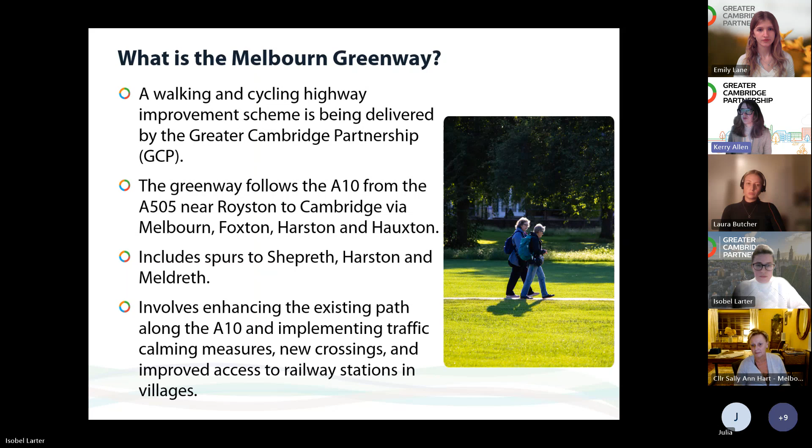In essence, the Melbourn Greenway follows the A10. It starts at Trumpington Meadows, continues down, and has some little spurs that you can see where it pops into Harston, Shepreth, and makes that connecting loop into Meldreth. But for the most part, it does follow the A10 until it goes through Melbourn Village and then reconnects south of Melbourn Village back onto the A10, where it then connects to a route that will hopefully end with a bridge into Royston.

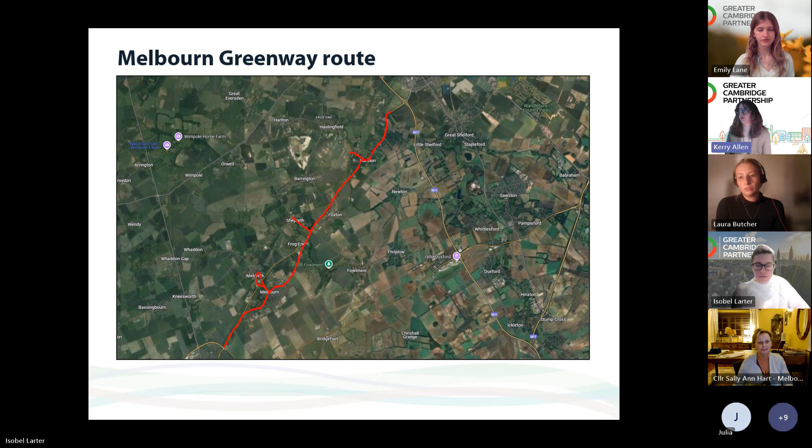So in terms of the route itself, it's providing a good end-to-end route. Next slide, please, Izzy. In terms of the route itself, it's making use of the existing highway, but it's providing those enhancements. It's widening footpaths out so we can create shared use paths connecting into existing infrastructure as well. So again, the key objective is providing that safe end-to-end route.

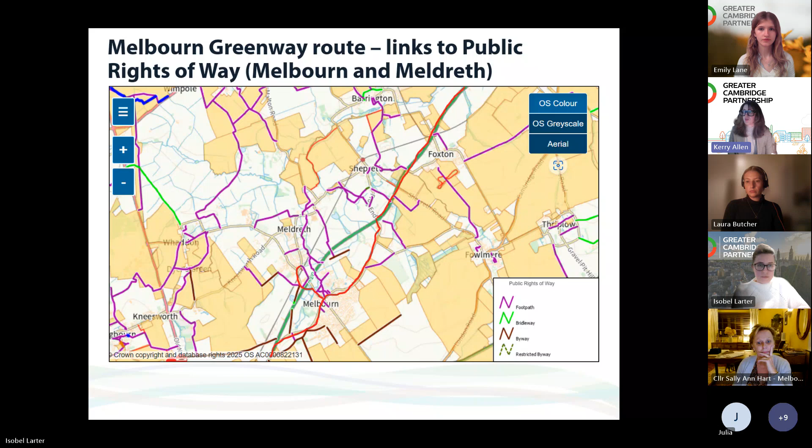And it's trying to connect with other existing routes for walking and cycling. As you can see here, connecting in with the public rights of way that are available. I've had to superimpose for Melbourn and Meldreth, but certainly we see these greenways as providing a point at the moment to connect in with the existing infrastructure, but also a purpose to build upon. So if there are future schemes that come forward, they will also obviously link into that. Next slide, please, Izzy.

It's important just to revisit this point as well. There has been quite a lot of engagement work that's taken place with members of the public on the greenways, in particular the routes and what they look like. Certainly there has been three key consultation events that have taken place with members of the public and stakeholders, and that's been really effective in helping us to shape the proposals that we have today.

And certainly we're continuing to respond to changes and things that happen along the way, such as new development cropping up, so we have to bear that in mind. And indeed there has to be a cut-off point - we can't keep making changes forever. But it's quite pertinent to just act as a reminder that there has been that engagement with members of the public.

In particular looking at autumn 2022, there's been quite a lot of feedback that we've picked up, in particular in terms of the arrangements through Melbourn itself. At the time, what we were proposing was a 20-mile-per-hour zone, which Melbourn now has. With Meldreth, that's something that's coming, and we'll talk about that a little bit more in detail in a moment. But it's just really key to point out that people did have their opinions on the 20-mile-per-hour zone, and some people felt that the 20-mile-per-hour zone on its own didn't go far enough and actually needed some physical measures put in place to ensure that people maintain that speed throughout the village.

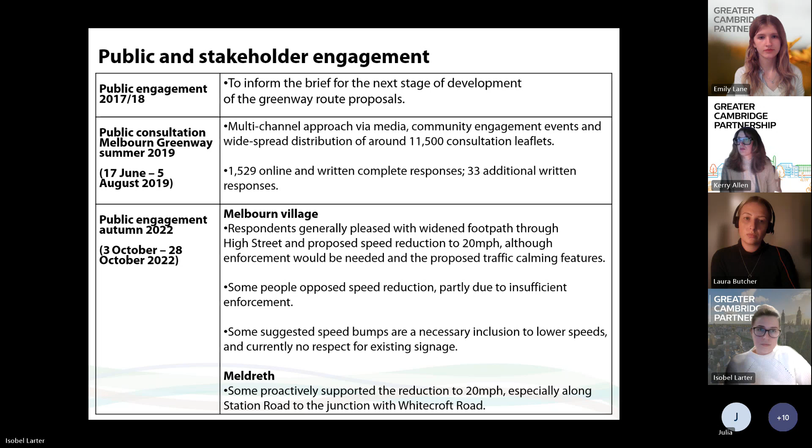Okay, thanks. So if you can bear with me here, because what I want to do is describe to you what the current or the previous design through Melbourn itself was going to do, and what the new design will do. This is a little bit fiddly because we'll be talking about Melbourn and Meldreth in terms of the previous designs - we will take a look at those and then talk about the changes.

I think ultimately what I want to get across this evening is that the focus is really on what we're proposing to do for traffic calming. The rest of the proposals, such as widening of footways and crossing points, will remain the same. So the focus really for this meeting, and indeed for the traffic regulation order, which is the form of consultation that we will use to allow you to have your say, really focuses on those traffic calming measures.

But in terms of what was previously proposed, it was a series of enhancements to the existing footways into the village itself. For example, north of Melbourn village, we were wanting to extend that shared use path into the village. We became very much aware very quickly that we didn't have the space to continue that segregated pathway, so we had to move to something where we were putting people on the carriageway, that mixed use arrangement. Again, we had to think about what we did there to ensure that the speeds of vehicles remained low, and that people who were cycling felt safe to be on the carriageway.

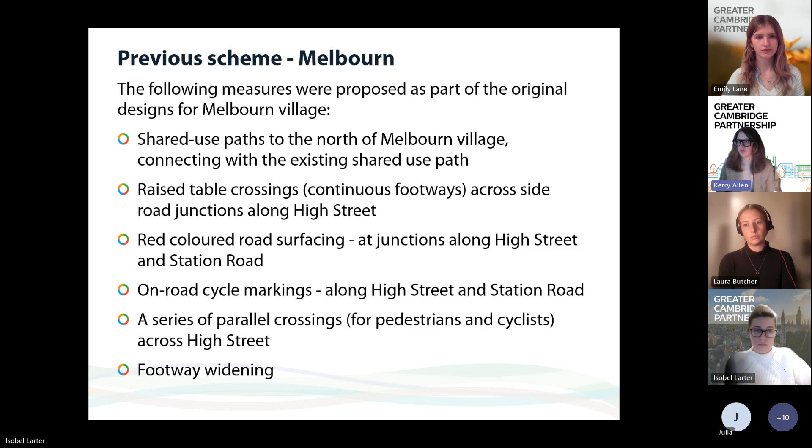For Meldreth, it's very much the same in the sense that we were looking to use red coloured road surfacing to curb vehicle speeds. The same traffic calming approach applies in both villages. For the most part, the rest of the scheme stays the same, where we're looking to widen footways where we can, but mixed use for cyclists on the carriageway will remain.

And how that translates a bit more in terms of plans. If you bear with me, I'll ask Izzy to stop sharing and I'll share my screen.

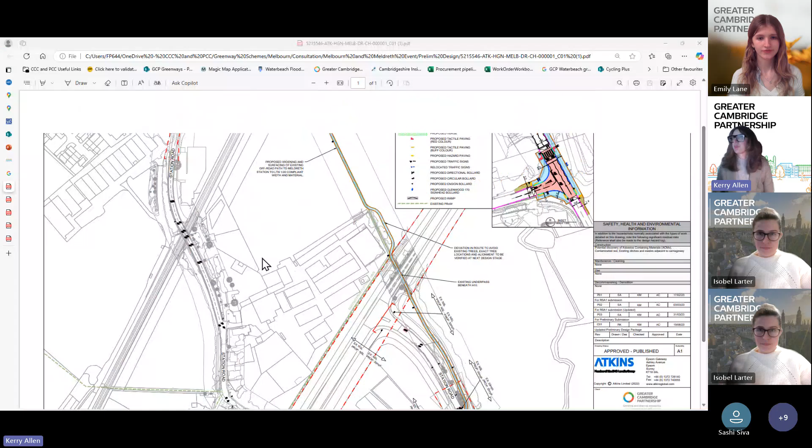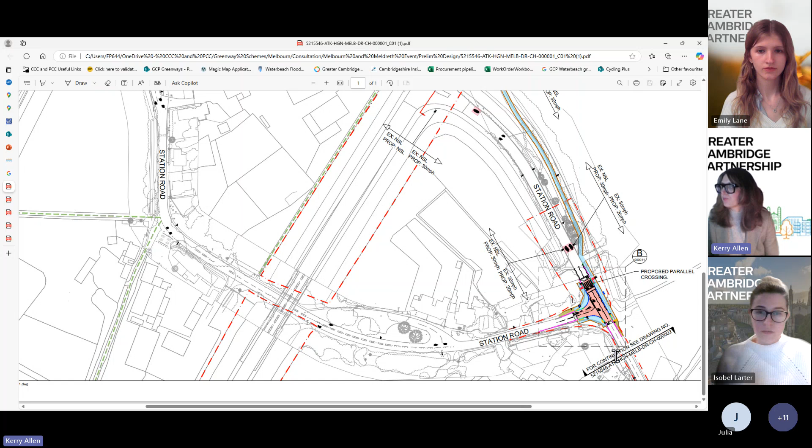Okay, I think this is the one. So if we start with Meldreth first, just to give an example - the resolution is always tricky to get right for everybody to see. But you'll see this red surfacing, so there are no physical traffic calming measures in place; these are known as psychological. It makes use of the red surfacing, and then road markings all the way through Station Road, which takes us to the point where it meets another part of Station Road, linking off to the A10 and up to Melbourn Village itself.

Hopefully this will change - hopefully you can see a different screen. Yes, team's nodding their head. So this brings us into Melbourn, into the High Street itself, from this point here. Again you can see the use of the red surfacing.

There are certain points where we've widened out the footpaths, but again we're making use of that red surfacing. Coming from the northern section of Melbourn, it's pretty self-explanatory that there's the red surfacing used. In actual fact, it was applied all the way through on the southern section as well, all the way through Melbourn itself.

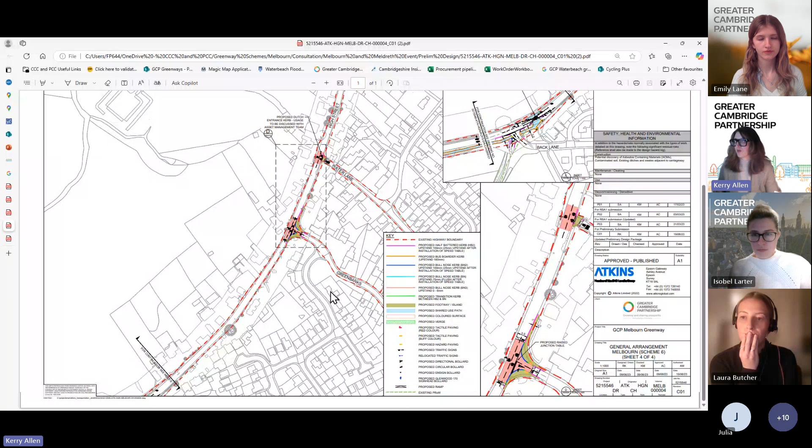Izzy, do you want to share your screen again? We can come back to these plans - I'm quite happy to when we come to the questions. Okay, hopefully we're back on the slides now. If you can just go to the next slide.

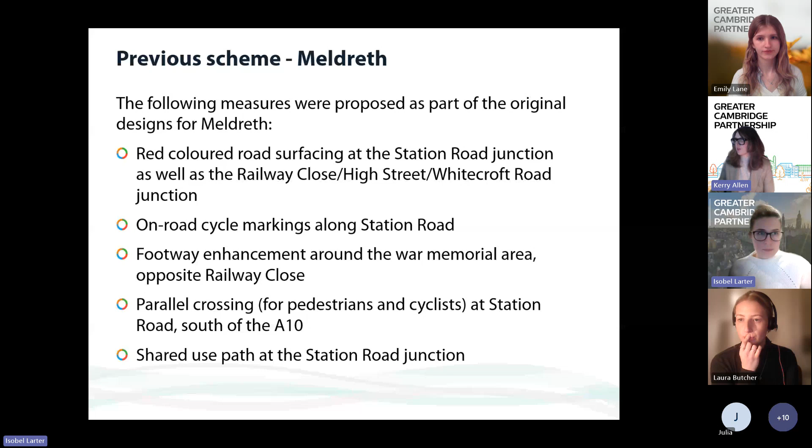So in terms of the new proposals, ultimately what we want to do is move away from the red surfacing, and we're looking to put physical measures in place - I'll make sure you have sight of that. What we want to do is put those physical measures in place to complement the 20-mile-per-hour zone that currently exists within Melbourn Village, but also the 20-mile-per-hour limit that will exist within Meldreth. The rest of the proposals we're looking to put in place will stay.

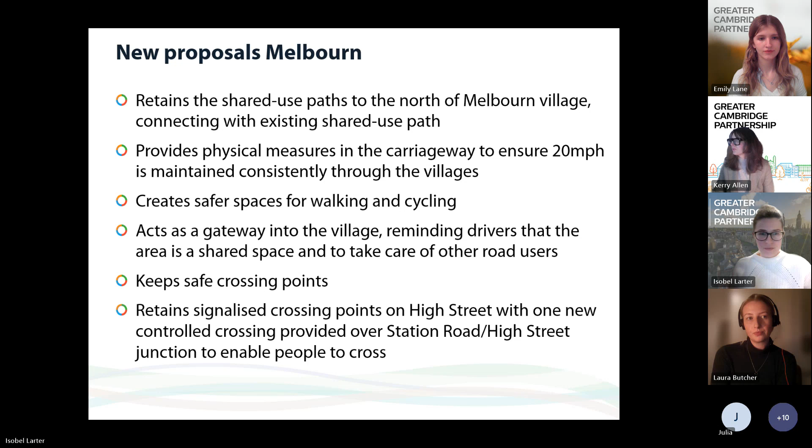So that will mean the widened surfacing and the crossings will stay. It will purely be the movement from the red surfacing to actual physical speed humps that we're looking to put in place. So what that actually looks like - if you can bear with me, hopefully this will by magic change and we will hopefully see a plan. So again, if I take you back up to Meldreth itself.

Let me just improve the resolution here. So what we're looking at is actual physical measures, in the form of raised tables and speed humps. You'll see that previously in the original plan we had this red surfacing. What we want to do is replace that with a raised table, which provides that physical measure to reduce the speed of vehicles. Coincidentally, it also ties in with the rest of the proposals for Station Road that goes all the way up to the primary school, where there are existing road humps - providing a consistent message to keep speeds low, that there are other road users on the carriageway.

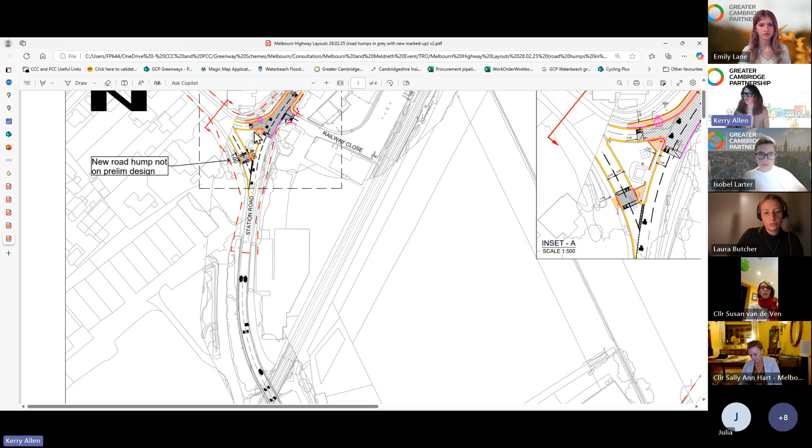What we've also wanted to do is put in a raised hump from Station Road to Whitecroft Road. We know there are issues with speeding along the bridge itself, so to complement that 20-mile-per-hour limit, we're looking to put in a speed hump there so it curbs speeds - people can't just pick up speed and swing in here where you have pedestrians and people crossing to get from the village to the railway station or indeed to the school.

Moving on, we're looking to replace elements of the red surfacing with speed humps, and that continues all the way along until we get to Station Road, which links up to the A10 this way, and then up to Melbourn Village in the opposite direction.

We want to retain and improve the footways, certainly improving the area around the memorial, providing wider footpaths where they didn't exist. The crossing points will remain the same as originally proposed. We want to provide a new crossing point here, which was originally proposed as part of the preliminary design and what we would have consulted on.

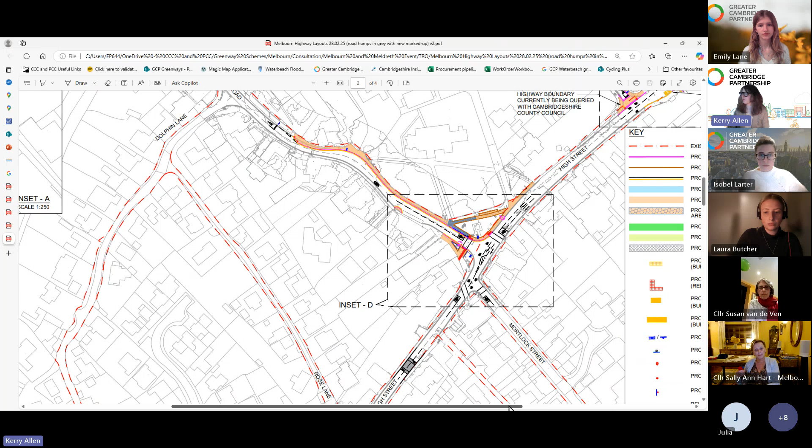Moving up through Melbourn Village itself, let me just double check that's going to give us what we need. Again, the red surfacing is going to be replaced by speed humps.

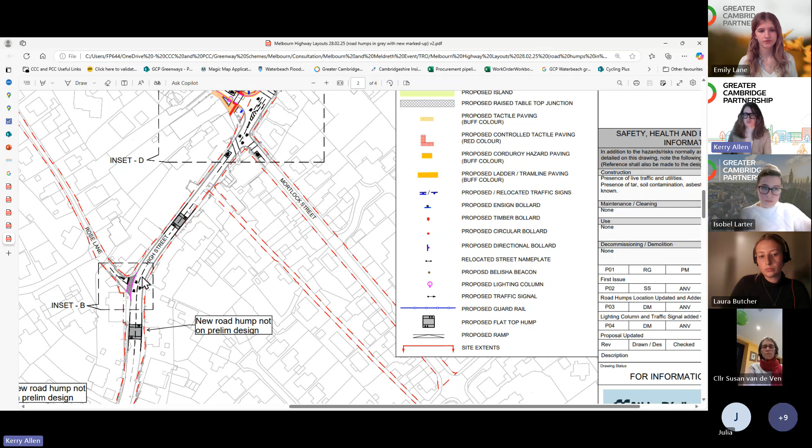The same goes to the south. There are side roads where we're looking to apply raised crossings as well, referred to as Copenhagen-style crossings. What that does is reduce the speed of vehicles coming in, giving pedestrians priority, which is set out in the highway code.

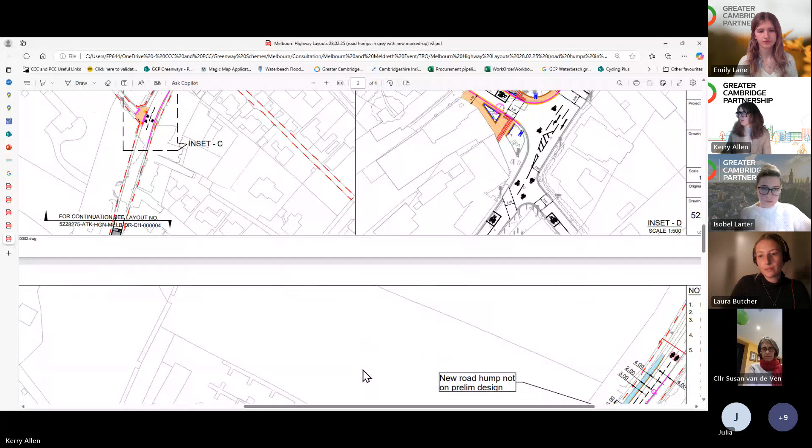Coming down through the village, it's more of the same with speed humps. Then, apologies, it takes us back up to the north of Melbourn, where we have the shared use path that comes in with the speed hump to the north. Again, footway improvements that we're looking to do.

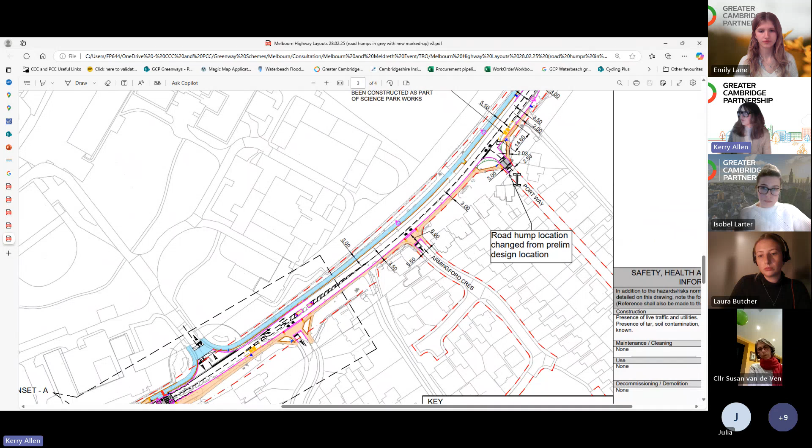Continuing down and linking in with the access point for the science park, providing a safe crossing point as well, so that people can get across to the science park itself.

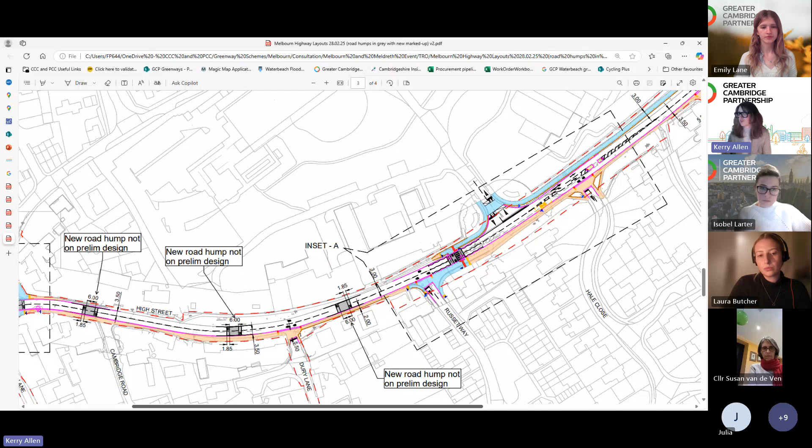Continuing down, you can see again that repetition of the speed humps. We're trying to keep these about 100 meters apart so it provides consistency, and again it reminds all road users to keep speeds low.

In this area, which links up to the college and also other key facilities, we've looked to provide a raised table.

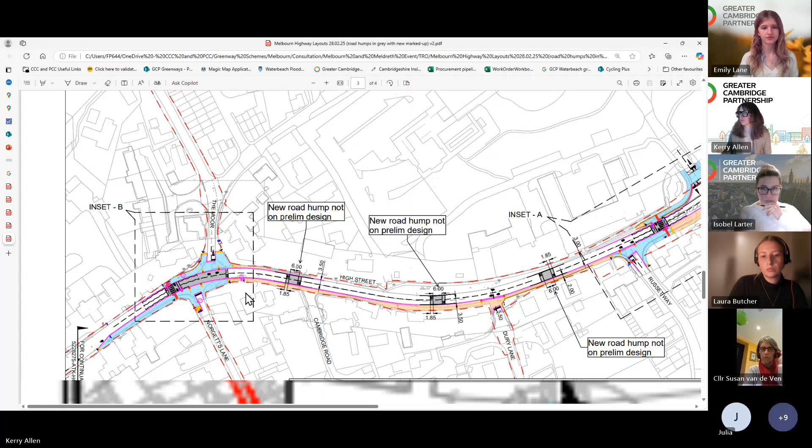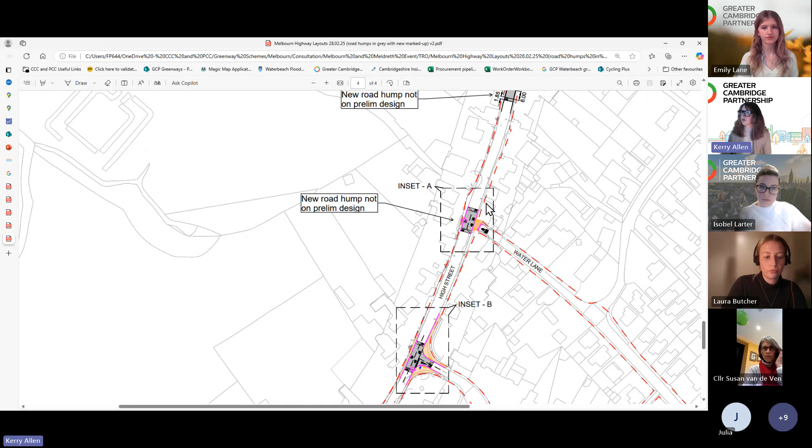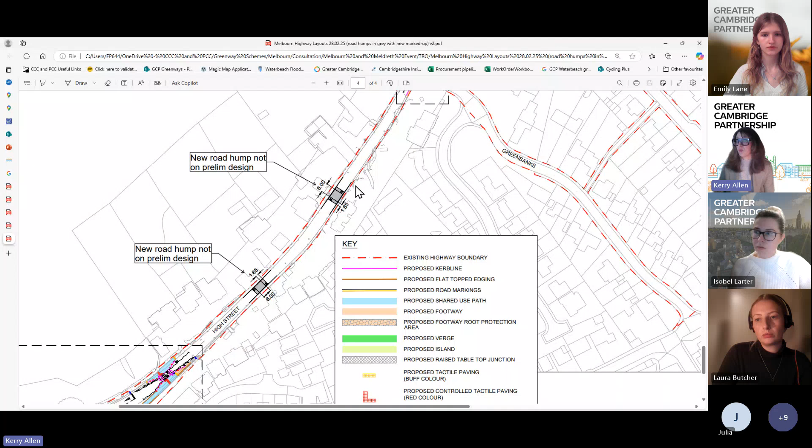Going to the south of the village, again it's more of the same with the raised speed humps. It's providing a reminder that speeds are to be curbed, and it's giving more safety to people who are cycling and walking who want to cross, and we've put in new opportunities for people to do that.

And then it links into a shared use path, which will continue along the A10 until we get to Royston.

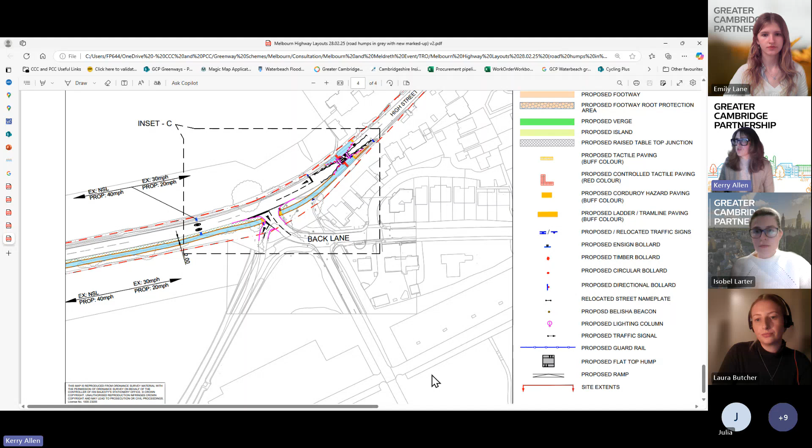I'm conscious that's quite a quick whiz through the designs themselves, and I'm more than happy to come back and go through those a little more slowly with people when we get to the questions. But let's get through the rest of the presentation first. Izzy, if you can reshare your screen for me.

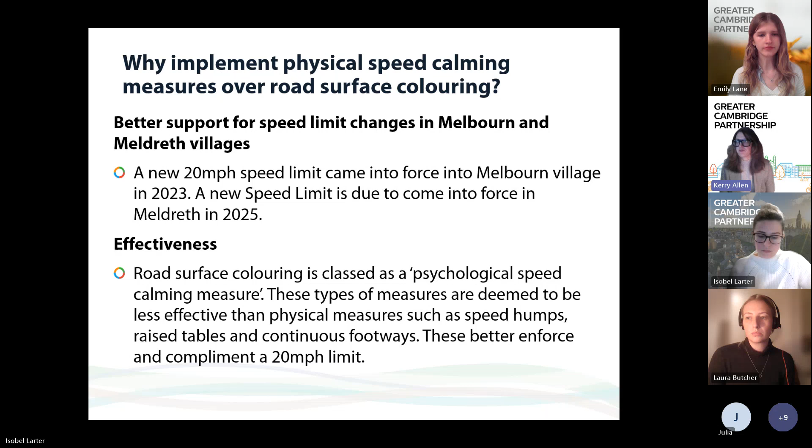In terms of effectiveness, the red surfacing is not deemed to be an effective way of keeping speeds low. So we've had to relook at this and consider what we need to do to ensure speeds remain low. There have been many studies looking at 20 mph zones and their efficacy, and it comes as no surprise that without physical measures in place, they're not very effective. Izzy, if you can just go to the next slide.

As I say, there have been quite a few studies done on that, and it's proved that. We're very much aware that the police themselves are also not a fan of 20 mph zones without the physical measures in place.

I think there's another thing to consider here, which also affects place shaping for Melbourn and Meldreth. We're very much aware there are conservation areas around, in particular Melbourn Village, and we want to make sure they remain aesthetically pleasing and pretty, because what we're trying to create here is also places that people want to come and visit.

So actually the change in the red surfacing will help improve the look of the village itself, rather than having red surfacing everywhere.

That is really important, because when it comes to the maintenance of that red surfacing, it becomes very costly and expensive for the county council. So what happens is they remove the red surfacing and replace it with black tarmac, and that's not something we want. The greenways we want to last as long as possible, and we want them to look good for as long as possible. So again, this is another consideration.

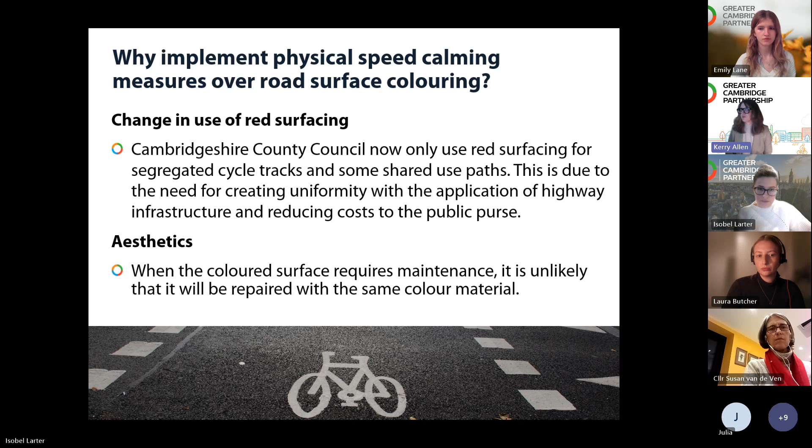Next slide please, Izzy. And I did mention this earlier about the need for physical speed reduction measures. As I say, there have been many studies done on it, and the conclusion is it's not self-enforcing without physical speed measures.

It's not deemed effective by the police. Actually what they tell us is if you are putting in a 20-mile-per-hour zone, you really do need to be thinking about physical measures, because the police do not have the resource nor the time to sit in one location checking that everybody is doing that speed.

We also need to remember this is a walking and cycling scheme, so there are guidelines and rules we need to abide by when designing walking and cycling schemes. Local Transport Note 1/20 tells us that where we are looking to put in a 20-mile-per-hour zone, we should be putting in those physical measures.

Psychologically, for people who cycle, that also gives them confidence, because they know they're not there on their own. They have something physical which is curbing the speeds of the vehicles going past them.

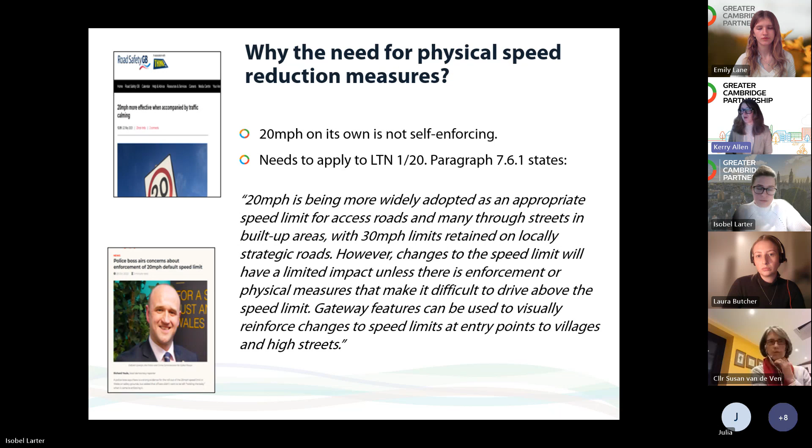Next slide please, Izzy. At this point, I'm going to give my voice a rest and let Laura explain to you about the traffic regulation order. This will be the process that we will use.

What we've done is put out the plans showing the speed humps, and that is really your opportunity to comment on those. It has gone live as of today, but rather than stealing Laura's thunder, I'll let Laura talk through the traffic regulation order and what that is.

Thanks, Kerry. So yes, the traffic regulation order is a legal document that will be used to implement the traffic calming measures Kerry has just discussed. As Kerry said, it acts as our consultation period. It's 3 weeks long, it opened today, and any responses or comments should be submitted by midnight on the 23rd of March. We've also set up inspection points at the Melbourn and Meldreth Parish Council offices.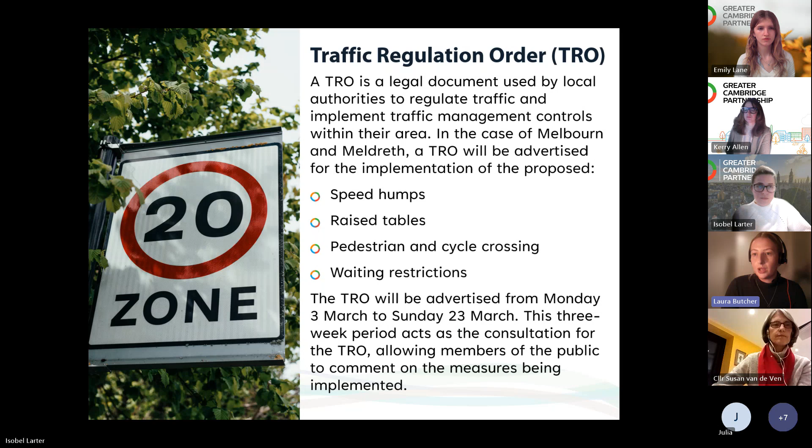So if you'd like to see a hard copy of the plans or of this PowerPoint, that's where you'll be able to view them. If you would like to comment on the TRO, you can visit the Melbourn Greenway website page on the GCP website, where the information is available. If you go to the next slide please, Isobel.

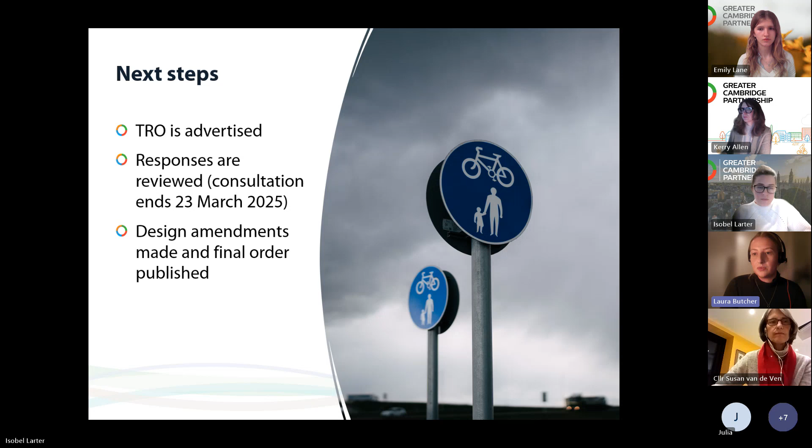Thank you. In terms of next steps, the TRO is advertised, as I say, at the moment, and it will be open for 3 weeks. The responses will be reviewed, and then eventually design amendments will be made and the final order published for the TRO. So yeah, back over to you, Kerry.

Thank you, Laura. I think now is a good time to open the floor for any questions. I can see there's already a hand up from Councillor Hart. Please let us know if you have a question, and if there have been any questions in the chat as I've been going through the presentation, I think Izzy and Emily will let me know. But Councillor Hart, do you want to start? You're on mute, Councillor Hart.

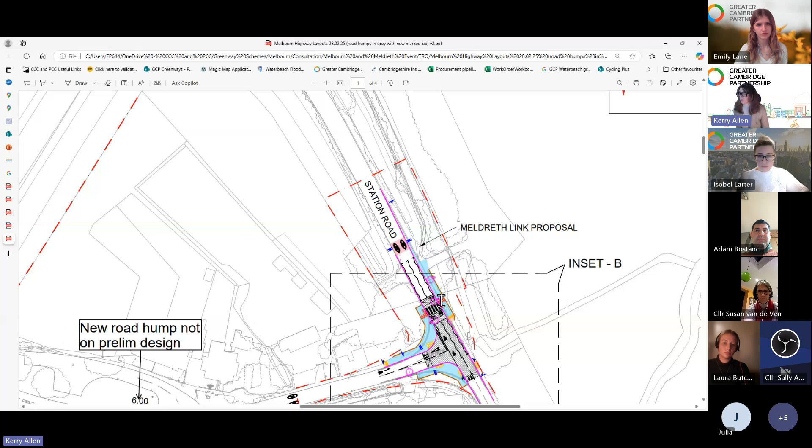We refer to them as a parallel crossing, or they're known as a tiger crossing. What it does is segregate pedestrians and cyclists - cyclists here and pedestrians here. As a cyclist, if you're using it, this is the shared use path, wide enough for pedestrians and cyclists. They'll slip on here - cyclists will use this point, pedestrians will use this point. That's the arrangement that will then connect in with the Meldreth link.

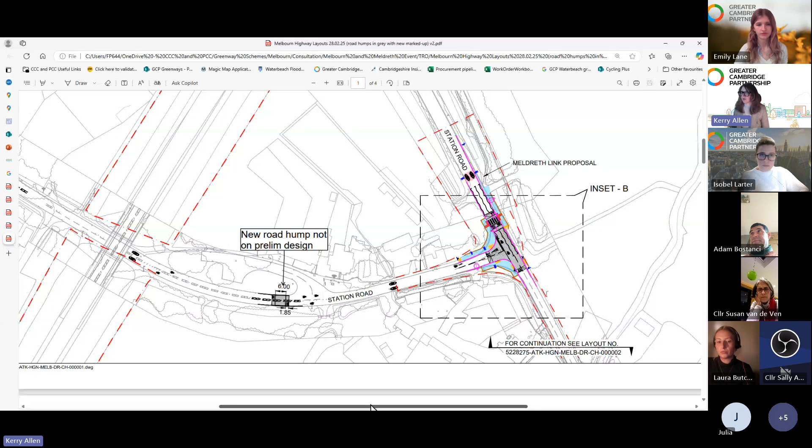In terms of how that looks going up to the bridge and around to the front of the station, we'll have a speed hump here, continuing all the way along Station Road. It's reducing speed up towards the bridge, and over the bridge again at this point, because we're aware this is an area where people are crossing. The provision here isn't great at the moment, so there'll be a raised speed hump here, and a raised table at this point, just to improve the crossing points of getting people across the road.

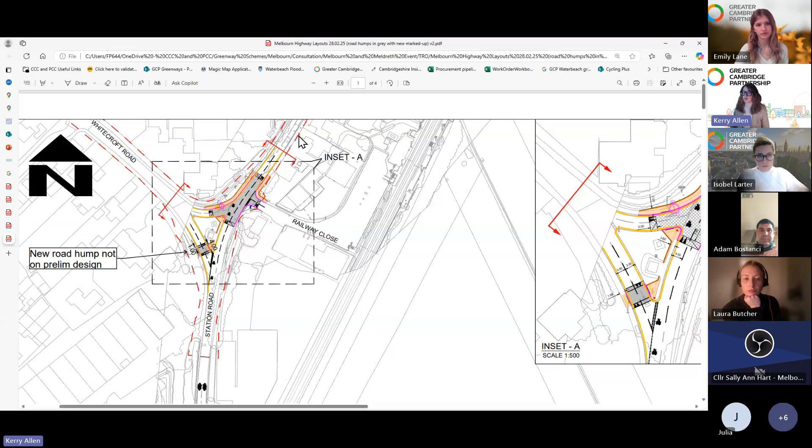It's important to point out that there currently are double yellow lines along some of this section, but we're looking to infill that with double yellow lines as well, so we can keep visibility on this section, so people can see where to cross, and motorised vehicles can fully see where there are people milling around or crossing in this area.

Does that answer the question, Adam? Yes. Can I ask a very quick follow-up?

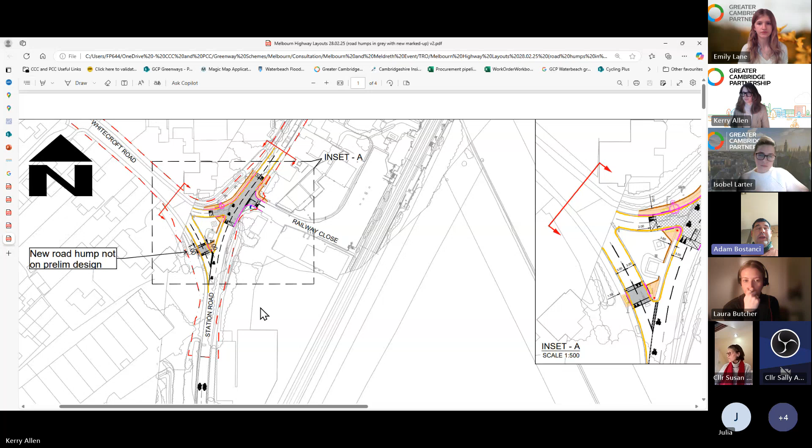You've mentioned the speed humps - could you describe them in a bit more detail? I think the standards have changed. For example, at the Tesco car park in Royston, I believe they've recently changed the speed hump, and it's become much less aggressive from a driver's point of view.

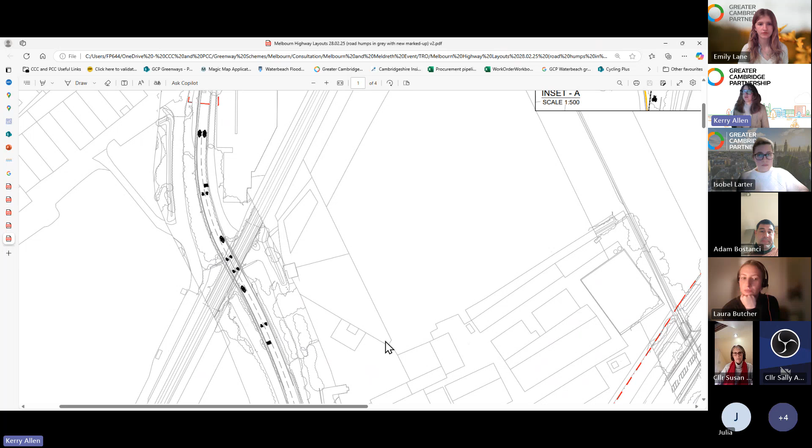What we're looking at providing is speed humps 75 millimeters high, covering the full width of the carriageway. We've moved away from previous schemes with speed cushions that had space either side - that just means motorists position themselves either side of the gaps, and it has no effect at all. So we're looking for the complete width of the carriageway, flat topped but sinusoidal ramped, which is really important because it gives a smoother transition up and over the speed humps.

They're aggressive enough to reduce the speed of the vehicle, but not to the point where you're going to lose the front of your car. It acts as a constant reminder and physical barrier to say you need to slow down. With that 100-meter spacing we're looking to achieve, it's a consistent thing rather than vehicles getting over the speed hump and then just getting up speed. It's trying to make sure they're maintaining that 20 mile per hour speed.

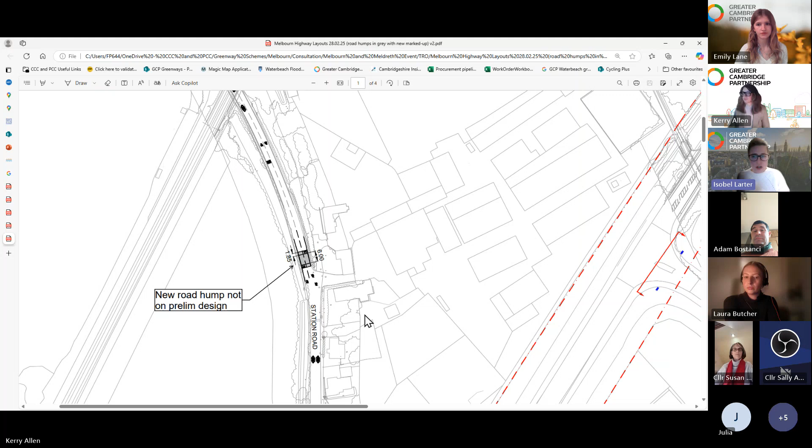No, I'm still not hearing anything. Kerry, Councillor Hart has put something in the chat, so I'll just read that out: please can you confirm speed reduction arrangements at this junction? She'd like to declare an interest, as she does live on the corner, but is very happy for speeds to be reduced, as they may stop further accidents when vehicles crash into the corner of their house. It also seems perfectly reasonable to enforce a 20-mile-an-hour speed limit through villages using physical methods, in her opinion. Thank you, Councillor Hart.

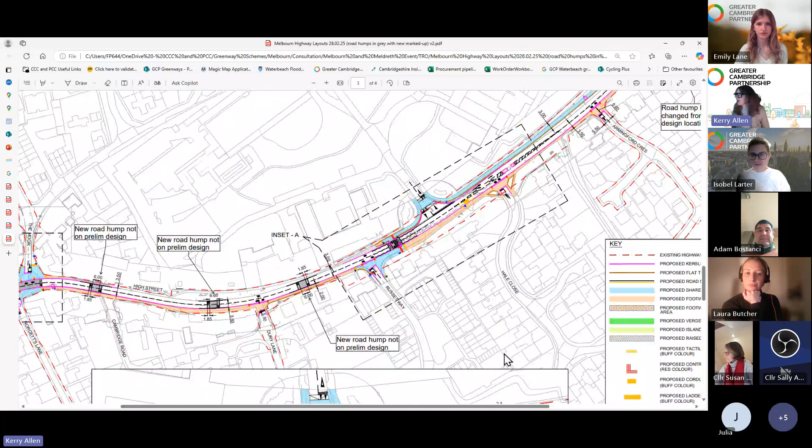Right, now I'm in the... sorry, my apologies. It's very difficult to try to get this into a way that makes sense. But Rose, I thought it was down here. I think you have it, Kerry. Do I? Okay, thank you. Oh yep, Rose Lane, right there.

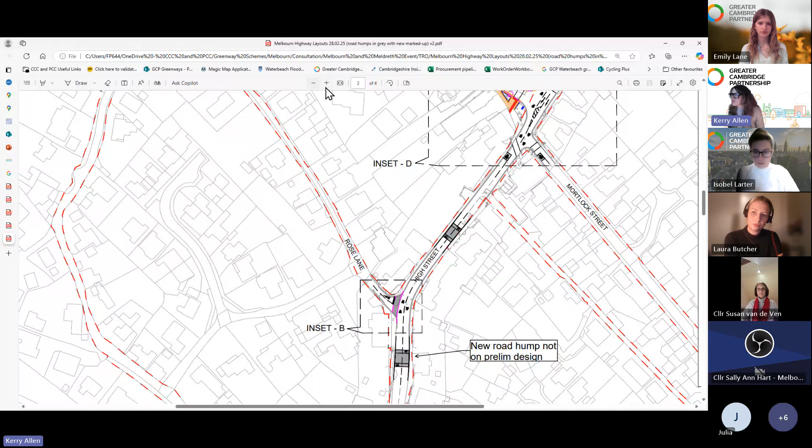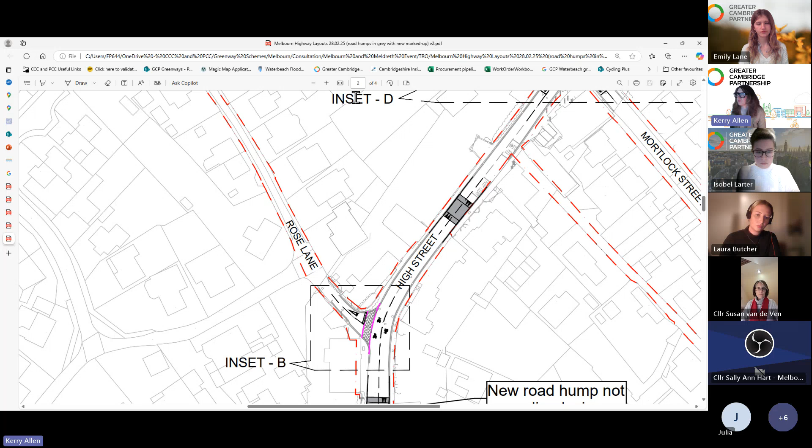So in terms of Rose Lane, Councillor Hart, there will be a raised speed hump to the north of Rose Lane, and then also one to the south. Also, if I can zoom in a bit more, in terms of the approach to Rose Lane, what we're wanting to do there is a physical measure — more a different use of surfacing to slow vehicles down coming through. That different use of surfacing acts as a reminder to them that this is a continuation of the footway, and to take care.

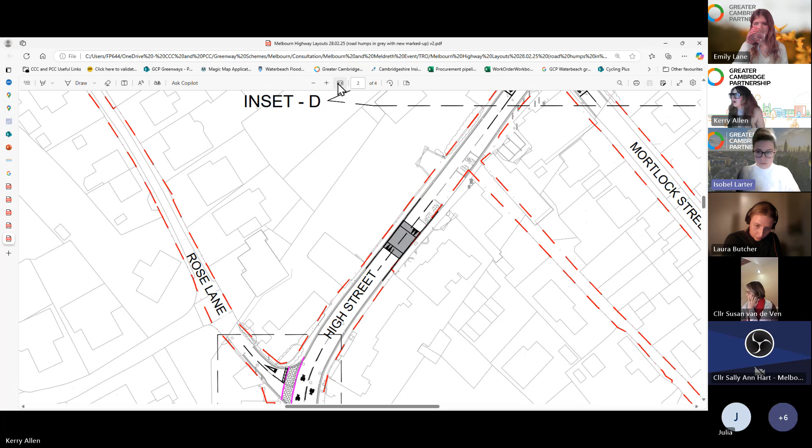I believe — just bear with me. Yeah, it looks like we're going to pull out the footway there just ever so slightly, and what that does is tighten the junction as well, so it prevents vehicles from being able to kind of swing in. So again, it's just providing that extra protective measure for people who are walking.

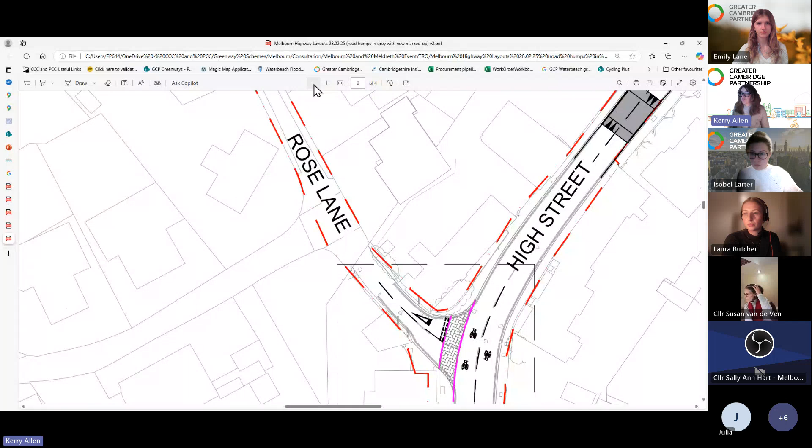Does that answer the question, Councillor Hart? If there's anything further, please do let me know. Thank you, Kerry.

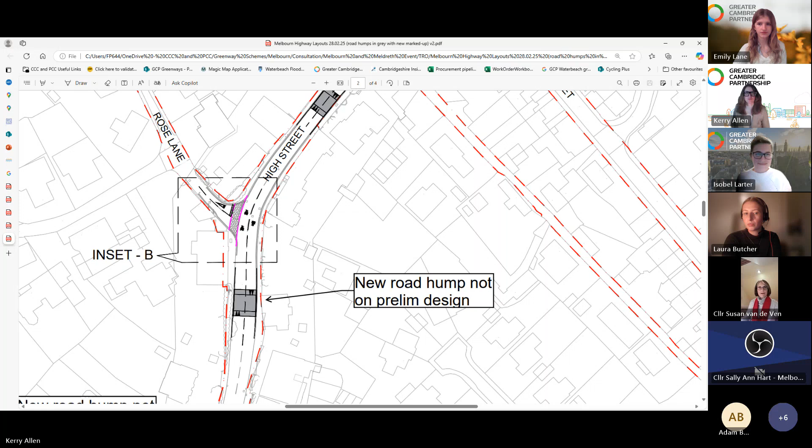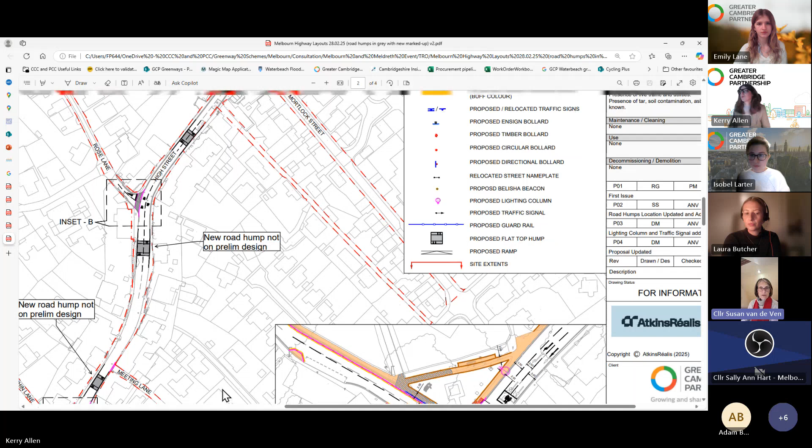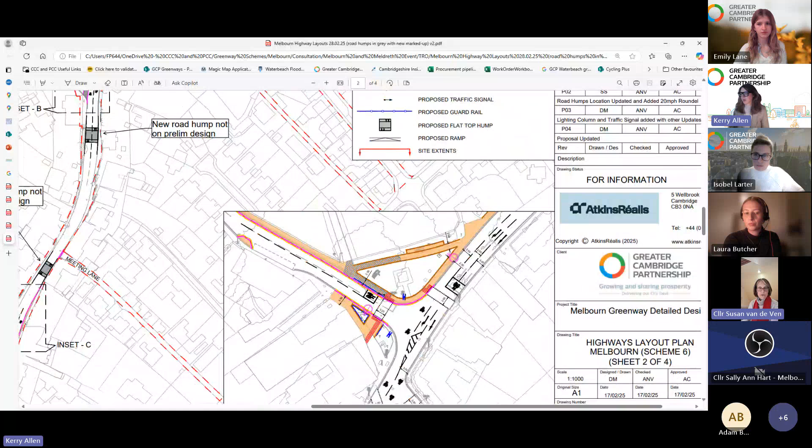The first one is, I wondered if we could focus again on High Street, Melbourn, from the traffic lights toward Back Lane — I guess that's the southern section. My question there is around the positioning of the speed humps, and where a speed hump is placed, I presume there would be a restriction on on-street parking in the vicinity. That's just a question about the reminder of the positioning. It's a very narrow stretch of the high street, and there is quite a bit of on-street parking, so I just wondered about any restrictions there, and how far the restrictions go — just to get a sense of that.

Do you want me to ask my other two questions first, or wait? So I'll deal with this one, and then we'll — just in case there's a follow-up on what I say. But okay, yeah, it's a good question.

Thank you. So I think certainly where the speed humps are being placed, we're trying to make sure that they are away from old buildings, and we're very much aware that on the southern section, on-street parking is a must, because there aren't any alternatives. In terms of the raised speed humps themselves, vehicles are permitted to park on them. We certainly do not have plans to put any double yellow lines or restrict any parking on those — they can continue to park on those as they currently do on the highway. So that shouldn't cause any sort of displacement of vehicles; they should still be able to do that as they normally do.

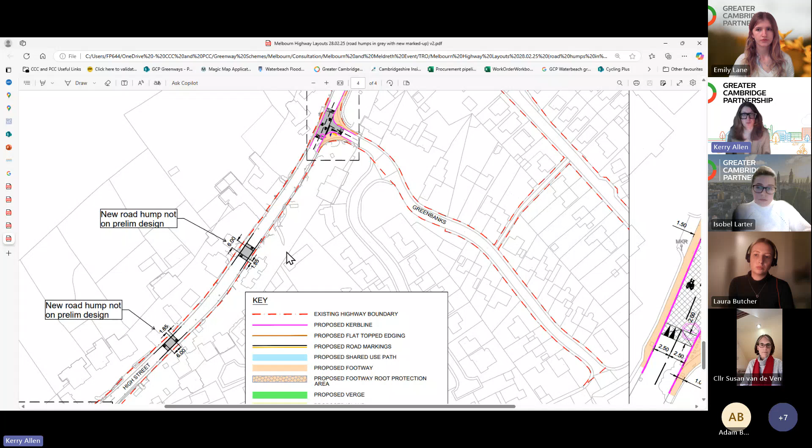Whereas with physical measures, you are forced to stick to the speed limit, because the physical measure is there. Unless somebody really wants to take their car over it at 30 or 40 miles per hour, which means they really aren't caring about their vehicle, let alone anybody else. We found you were getting over 90% compliance with the speed limit. The 20 mile per hour zone in Melbourn has had some effect, but looking at results sent over from previous traffic speed captures, there's still quite a big percentage of non-compliance. So with speed humps, you are forcing people into compliance, because unless you want to do real damage to your suspension through consistent high speed over speed hump after speed hump, it's a better option. It will ensure that 20 mile per hour compliance is fulfilled, which is what we want.

Does that answer the question, Susan? Yeah, no, that's great. If you can post that information on the website.

Thank you. The final question is about publicity of the traffic regulation order consultation. I know the parish councils are set up to reinforce the consultation, but will the GCP website have a link there that we can link to, so all the information is in one place? Yes, we will ensure the link to the traffic regulation orders and how to respond is all available from the GCP website. It's important to note people can respond via email or in writing. If people need assistance understanding the plans, there's a telephone number where somebody can walk them through the plans.

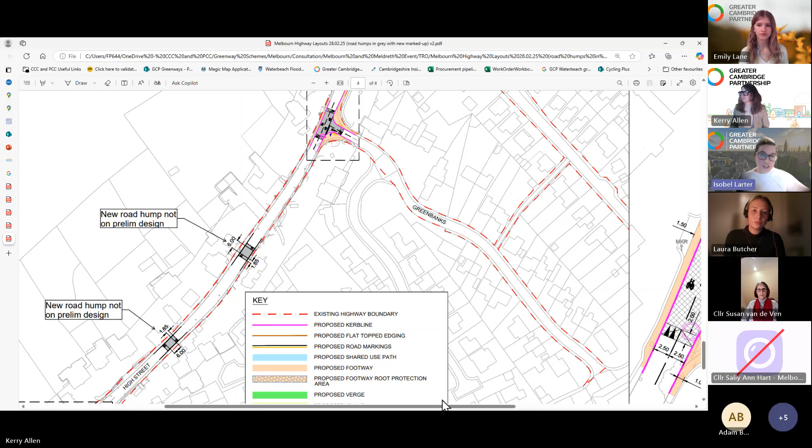We appreciate there is a lot to take in with these sort of plans. So as Kerry said, if other questions occur to you over the next three-week period, please get in touch with us via email or phone call, and we're happy to pick up any questions, or if there's anything a little bit confusing. We appreciate there's a lot of detail in these plans, and we're happy to cover those off as well.

I can see we have got another question in the chat, Kerry. So from Sashi: how will the works be staggered if this goes through? What is the proposed length of works?

That's a great question. Certainly in terms of when we would like to start works, we would like to start works in 2026.

We're also conscious that there's a number of other things going on. So where possible, we will ensure that our scheme marries up with any other highway scheme happening in the area, so that we don't have this scenario where one set of works starts, and then a couple of weeks later we come in and cause mayhem all over again.

In terms of duration, I can't put a firm timescale on that at the moment, but we will look to address this in phases so that we're not creating chaos over the whole of Melbourn High Street. It feels sensible that we would maybe start in either Meldreth or Melbourn, with one following the other. But those will be in phases - small sections that we do, and then we continue moving up or down the high street, however it seems right to do.

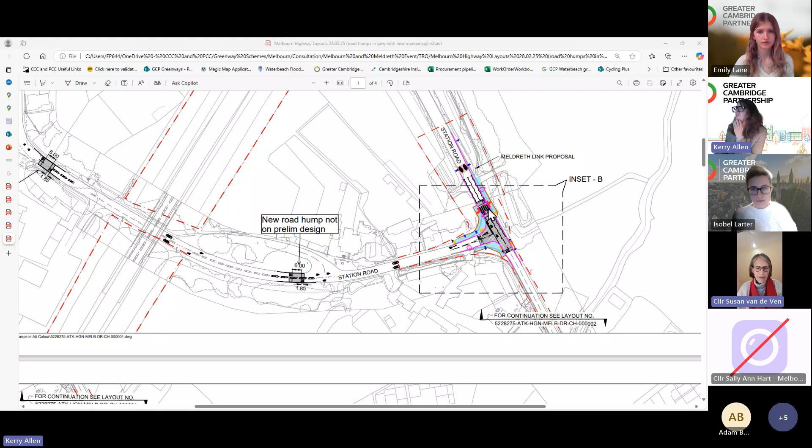Could you say some interesting things about how that configuration is going to look, because there's going to be a new crossing point. I forget what it was called, a tiger crossing point, I think. It's known as a parallel or a tiger crossing. We like to use animals to describe most things on the highway.

So you mean this section here, Susan? Is that correct? Yeah, I'm imagining the maneuver from coming out of Melbourn Station Road, wanting to take the new link path to Meldreth Station. Yep, and there'll be that crossing point there, pedestrian crossing point. But that's not signalized. No, it will act as a conventional zebra crossing.

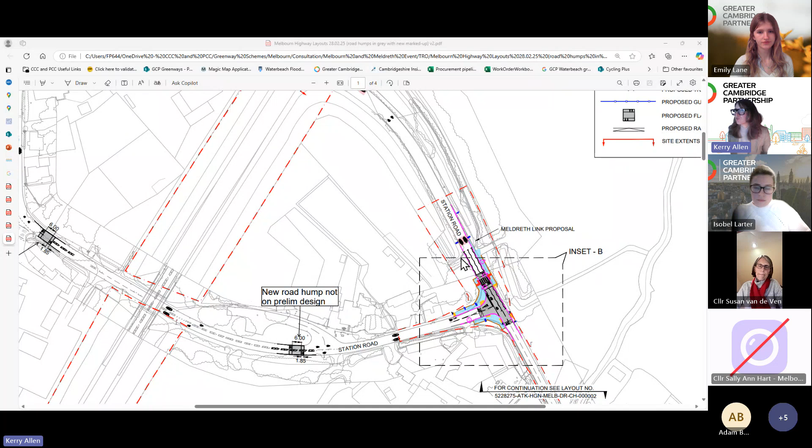So it will have beacons, the flashing beacons, and bearing in mind, and my apologies that you can't see this so clearly, let me make this a bit clearer. Hopefully you can see these two arrows here, and that indicates this is a raised crossing. So this crossing here will be raised, meaning the vehicles will have to slow their speed in order to get up onto the tabletop. So that acts as the physical measure in order to reduce the speed.

You could possibly argue that could be brought back a little bit, actually, so that you have a bit more of a warning as a driver coming up, and then having some space there, and then there's the crossing. So I can speak to the team about that, about why that's configured like that.

Certainly coming from this side, as a motorized user, you would need to reduce your speed because that's where the hump rises. So although there isn't signals here, you do have the protection that this is on a tabletop, and it will work as a conventional zebra crossing, but this is just known as a parallel crossing, basically.

Okay, I guess that's really, really helpful, thank you. And I'm thinking about the current new entrance to the new path, which sits next to a private stretch of tarmac to a private field. We've got, and so there's a lot of tarmac there, and there's a few teething issues in terms of perception of what that tarmac is.

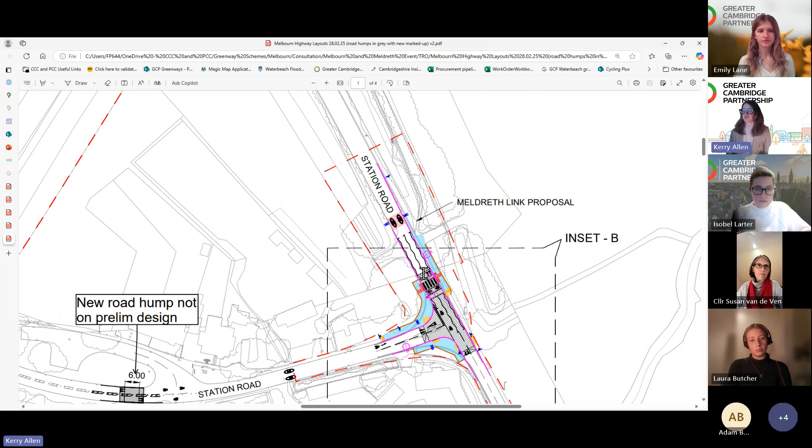I think we have to strike a balance, but certainly if there are areas that you feel the design doesn't quite cut it - it might be that actually just the spacing here isn't true to reality, it looks a little close to me - perhaps we might tweak this a little bit. But I wouldn't want to invite people to get us to start again, otherwise we're never going to get to the point of completion.

I know that's not what you're asking, so within reason, if there's areas of concern, we can definitely look at those. This is the result of a long period of discussion, but if things still aren't quite there, we'll definitely look at them. As I've said, Back Lane and Rose Lane were two areas that we'll pick up and look at.

Thank you, Kerry and Councillor van de Ven. Sashi's got a question in the chat here, Kerry: will Back Lane changes affect the ambulance service?

The reason we've gone for the flat top sinusoidal ramped speed humps is because they are more comfortable for ambulances and for those narrow axle vehicles. Melbourn Village is also on a bus route, so it's for the comfort of ambulances and buses. So the answer is yes, basically.

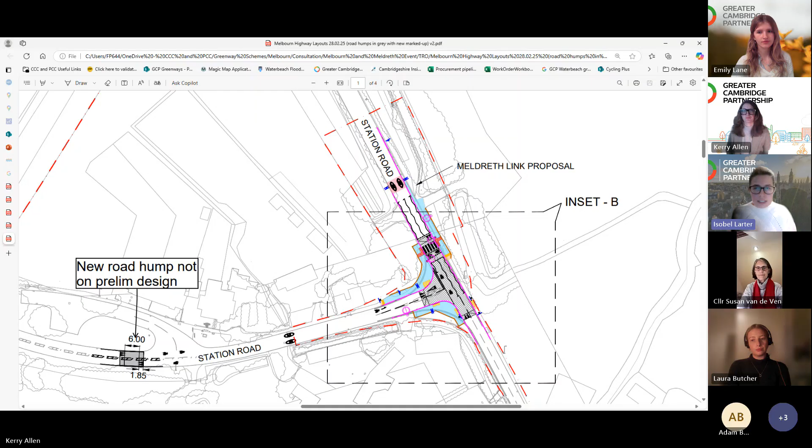Thank you, Kerry. I can see Councillor van de Ven's still got her hand up, but I suspect that could be a legacy hand, so not to worry. Adam, would you like to go ahead and ask your question?

Sure, seeing that we've got the time. So still on the part of the plan that you had up a moment ago. Yes, let me put that back up.

So as a cyclist, if you're coming out of Melbourn and taking that right turn, you'll be going up onto the table and then taking the right turn. I'm curious, maybe it's just a highway code I don't know, but are you meant to turn into part of the Tiger crossing to get across the other lane? Or how are you technically as a cyclist meant to take that right turn into the new path to the station? I'm asking because I have about 50 colleagues who do that turn every evening.

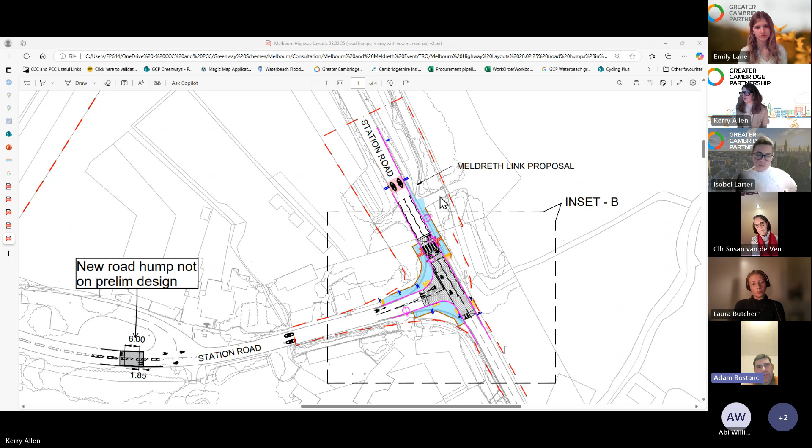Adam, you might need to assist me here. When you say that right turn, do you mean coming out of here and then coming down? Is that what you mean? Or are you going from Station Road, turning right onto Station Road into... No, sorry, I mean when you're coming out of Melbourn on Station Road, not out of Meldreth. So you're coming along there, right?

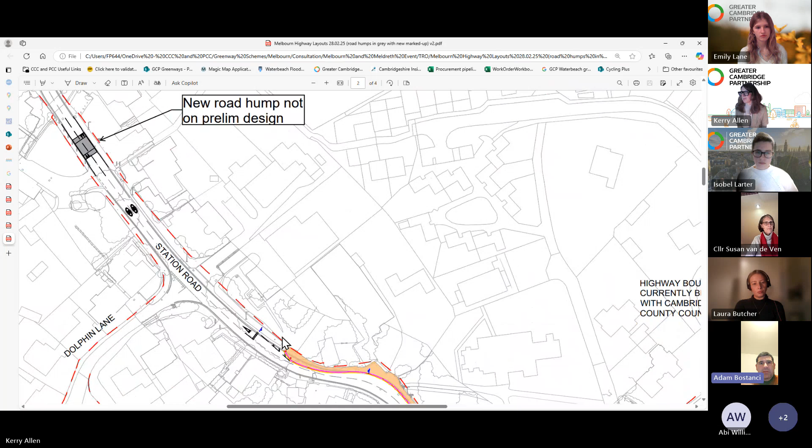So coming out of Melbourn onto Station Road, not Meldreth. You were in the right place to begin with. So you come out of Melbourn on the shared use path, you turn left, and then to go on to the crossing, you have to make a right turn. I was thinking, when you were saying right, are you doing this movement, or do you mean this movement? Is that what you mean, Adam?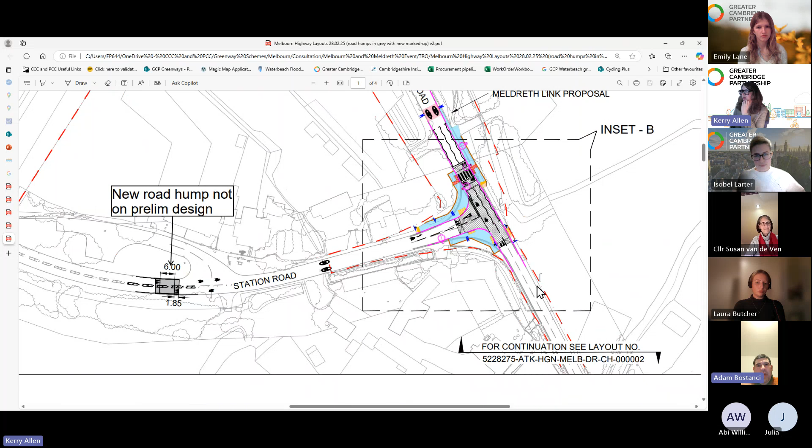I'm assuming the road coming out of Melbourn is called Station Road as well - is that correct, or has it got a different name? No, that's called Station Road. So yes, I see what you're saying - you're coming out of Melbourn on Station Road.

You will then, as you're getting close to the T intersection, be going up onto the raised table. You'll be traveling along the raised table until just before the pedestrian crossing and the bicycle crossing, the Tiger crossing. So I'm asking, how are you meant to make that right turn to get onto the shared use path? Are you meant to go onto the Tiger crossing, or are you at that point still treated as a cyclist using the road doing an ordinary right turn? Because if you're using the Tiger crossing, presumably you have priority, whereas if you're just turning as an ordinary cyclist, you don't have priority over oncoming traffic.

So you should have priority over oncoming traffic, because it should work in exactly the same way as a zebra crossing. Obviously you've got to make sure it's clear, but the onus is also on motorists to ensure that they're slowing down and looking out for you.

Obviously, if you're driving along here and you see a cyclist, you're not sure whether they're going to continue or cross. That's where you're expecting the motorist to be vigilant, but also they will have to slow their speed on approach to the zebra crossing itself.

As a cyclist, if you're coming from here and you're wanting to cross, then by all means you can make use of the crossing itself, and then continue on your way to where you'll rejoin the carriageway. Or if you want to, you can continue on, slip off and make this movement.

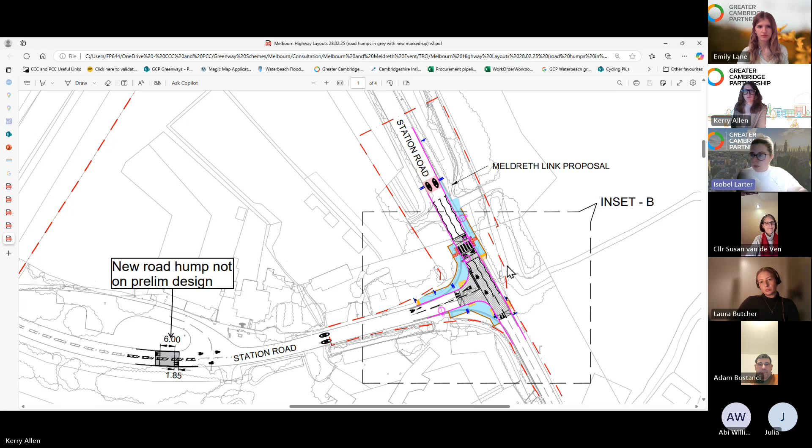What might be helpful as well, given we've just been looking at this crossing, I'll pull up a similar example, because this is a real life example that we've got. This is as part of the Horningsea Greenway, essentially a similar design to what Kerry's just been showing on the maps, so hopefully that gives a little more clarity.

I've also seen that Abi has put something in the Q&A about when the hard copies will be available, I think to Melbourn Parish Council. We expect them to arrive this week. I'd be preempting the postal service if I gave an exact date, but I'd like to think they would be with the Parish Council by the middle of this week. If there are any concerns, or you're worried there might be a delay, please get in touch with us and we can follow that up, or look at alternative options to make sure the plans get to you this week.

I can't see anything else in the chat, and I'm just going to check the Q&As, but I think that seems okay. We have still got plenty of time, and I've noticed we might have a couple of new joiners to the call. So by all means, if you'd like to ask your questions, or if there's any particular area of concern you'd like to discuss with the team, we'd be more than happy to cover that. You can put something in the chat, use our Q&A function, or raise your hand and ask your question verbally.